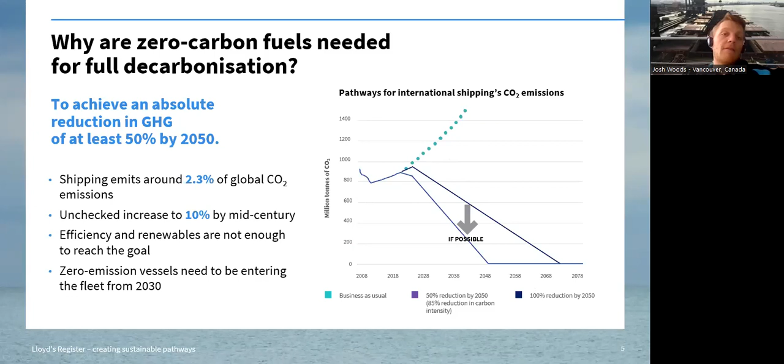And then we've got to look at it from, I think, the marine industry. The IMO and the different regulatory bodies are very good at looking from a tank-to-wake perspective in terms of energy emissions. However, I believe, and at LR we believe, we need to look at it from a more holistic point of view. So it's a well-to-wake perspective.

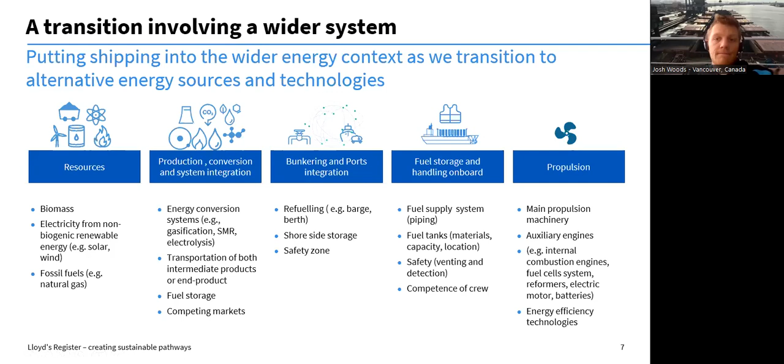So this is our LR decarbonisation hub and getting to zero model. And actually, I'll just take a step back here a minute. I know I mentioned the decarbonisation hub. It's a particular department within LR. It's not who I work for, but it's our focal point within the business for all decarbonisation projects and initiatives. It's run out of the UK in Southampton. If anybody wants to hear more about it, please get in touch with me. I can put you in touch with the guys there.

I think we're up to about 10 people now within that hub who are coordinating all our worldwide projects on how to decarbonise the shipping industry and how we can help our clients. And the way we're doing that is projects come into us all the time, and we're looking at them from our getting to zero model, and we're using a marine solution readiness level. That combines the technology readiness level, the community readiness level, and investment readiness level to give us a marine solution readiness level. And that is how we judge when a fuel is going to be available and ready to use in the marine industry.

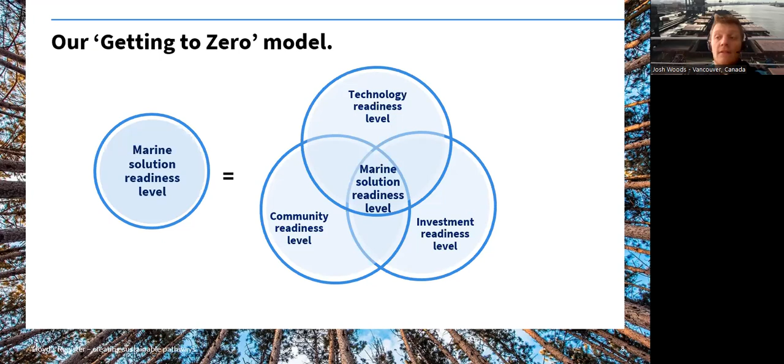It's basically looking at: is it suitable for use now? Can we use it now? Is the technology ready for it now? Is the community ready for it? And, more importantly, is anybody going to pay the money to put that fuel on the ship now? Or is it going to be 10 years, or is it going to be 20?

And I don't know if anybody saw, but LR recently sold our business assurance business, and we're now wholly focused on marine clients and the marine industry. So we don't have an energy business anymore. We don't have a business assurance business anymore. We're just solely focused on marine. And from my perspective, that's already making a difference. We're already able to focus more on our clients and be their trusted advisor.

And it's a complicated issue, right? There's lots going on, and a lot of ship owners are just waiting to see what happens. There's a reluctance to be a first mover. So at LR, that's why we've got the decarbonisation hub. That's why we're doing all these initiatives. We're publishing all this material just to try and help and guide the industry. We don't necessarily want to be the people to make the decision, but we want to help our clients make an informed decision.

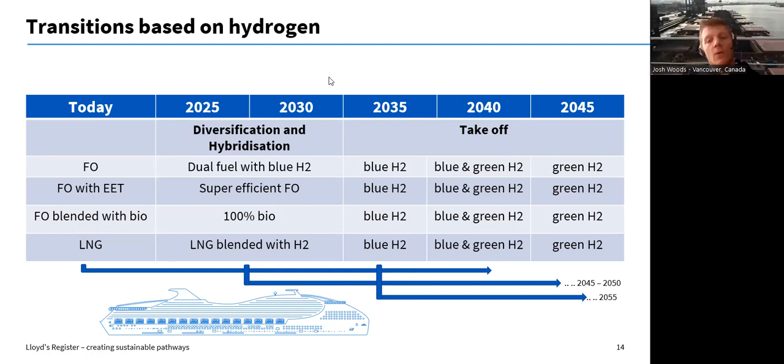Personally, I don't think that's going to happen. I don't think there's going to be one fuel fits all, but this is some of the key features of hydrogen. I'm not going to go through this in any detail because it's very easy to look up and you don't need me to tell you.

But there's distribution challenges, and it's very hard to store because it's very small molecules and it disappears really quickly. So there are quite a few issues with it, but it does have a lot of potential as well. I can share this presentation afterwards, so if you want to look at it in more detail, you can go through this slide at your leisure.

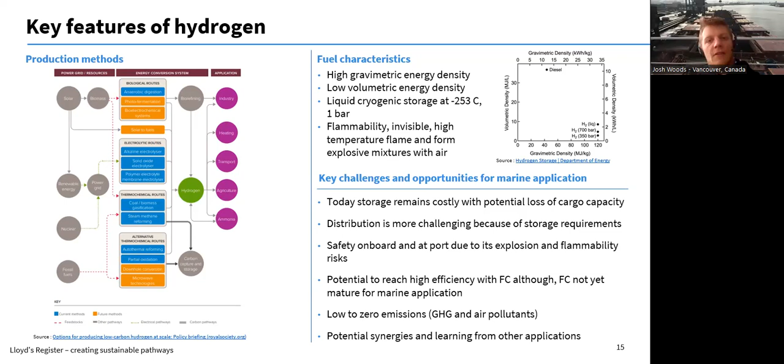So there's lots going on in the hydrogen space, and I know big oil majors such as Shell have all their eggs in hydrogen. I think it's definitely got a future, and Shell believe LNG is a transition fuel, and they don't think ammonia is the way forward. I mean, you've got to take it with a pinch of salt because Shell don't produce ammonia, but they do produce hydrogen. So there's lots of forces at play here.

But definitely some big industry powers behind hydrogen as a future fuel, and we're here to help them through these test beds and pilots that I've just described.

And now we go on to ammonia, and this is how we believe ammonia would work over the next 30 years if the industry adopted ammonia. As you can see, it's a very similar transition. So you've got your diversification, hybridization, so dual fuel, efficient ships, and LNG, and then you've got your ammonia that's produced through different sources. So you've got ammonia produced using fossil fuels, and ammonia produced through more renewable energy.

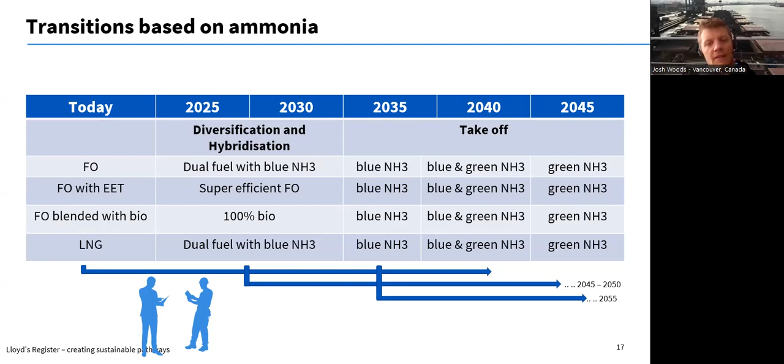So you have your green ammonia. I'm not going to dwell on this slide because it's very similar to the hydrogen transition pathway. Ammonia also has its own problems. It's very toxic, and so there's issues with machinery space having

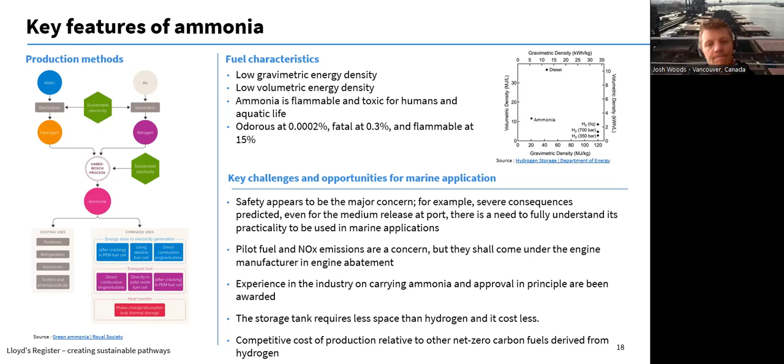What we did, which is fairly unique, is we approached an agricultural company that produces ammonia, because the main use of ammonia at the moment in the world is, I don't know whether it's pesticides, but it's used in agriculture. It's not used as a fuel at all. So we're working with one of these companies that produce ammonia, and we're pulling them into doing an AIP with

Has anybody got any questions as I go through, or are you happy for me to keep going? Silence, Josh. So I would keep going. Okay. Perfect. I'll take that as you're all absorbed in my presentation, so we'll keep going.

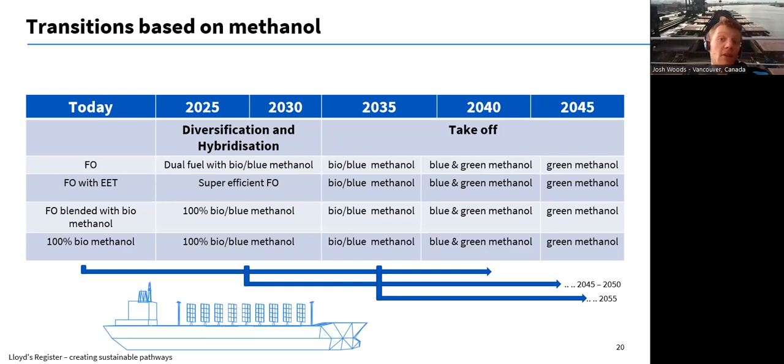This slide is very similar to the previous slides, but the interesting bit is how the ship owners, the operators, and the classification societies are going to work together to get all these ships online and trading on these alternative fuels in the early 2030s. There's plenty of pilots we've been running with methanol as well, with various industry bodies and ship owners. Those are the transition pathways from where we are at the moment to where we're going to be in 2030, 2040.

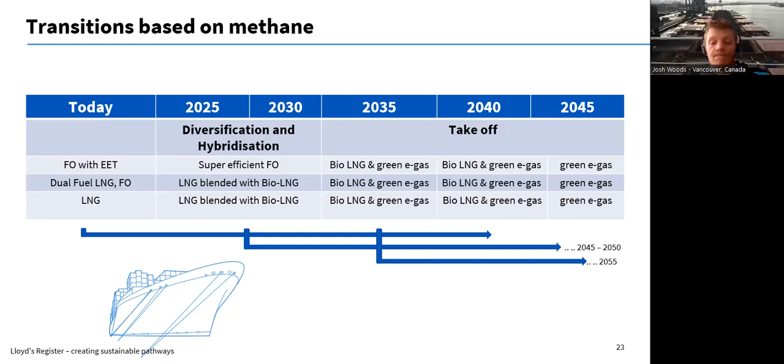Now I'm going to talk a bit more about the overall readiness of these zero carbon fuels. So how ready are they? How quickly can we get them into the industry and onboard vessels? This is something we've developed. It's called the Zero Carbon Fuel Monitor, an interactive fuel monitor where you can play around with the dashboard and look at the technology readiness level, the investment readiness level, and the community readiness level for a particular fuel.

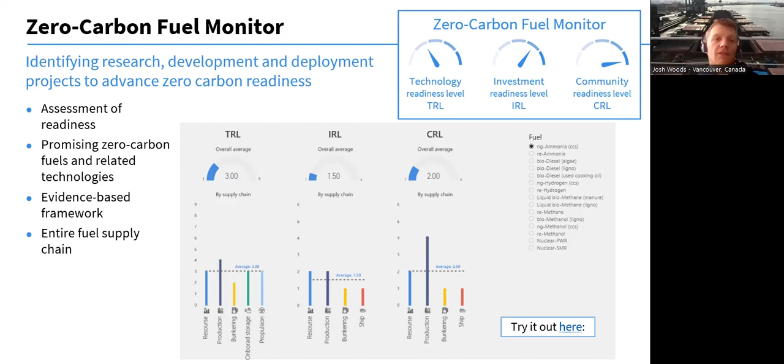And this is an interactive, free-to-use tool that we've really used to assess what level the fuels that you're looking at, or the fuels that your clients or ship owners are looking at, are at, what stage it is at the moment, and how we think it's going to be suitable in the future. So I'll just talk a little bit about the different ways we're assessing the fuels.

And as you can see, like the levelized cost of production. So the investment readiness is essentially going to boil down to the cost of these fuels, how much it costs to produce and how much it's going to cost our clients in the future to use those fuels. And to simplify it, is the cost prohibitive for anybody to invest in those fuels at the moment? And how long is it going to be until the price of those fuels comes down for them to be suitable to be used?

Because at the end of the day, you guys all know that we, as a shipping industry, have historically just used what's the bottom of the barrel, heavy fuel oil. It's the cheapest fuel that nobody else wants to use, and that's what's been fueling the ships going around the world for the last 50 years at least. So for us to change from that inexpensive bottom of the barrel fuel to something that's a lot more expensive, something's going to have to change, and somebody's going to have to pay the bill.

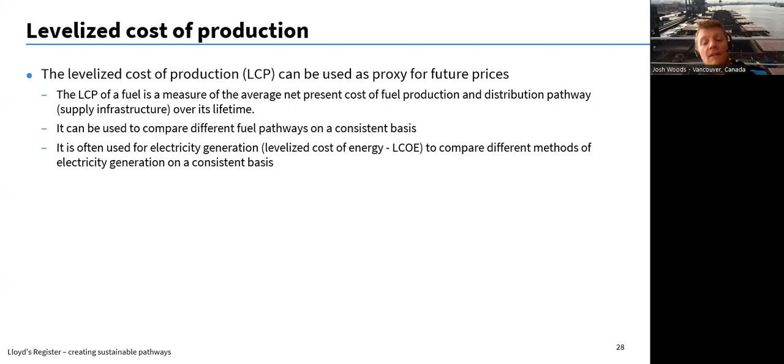Sorry, I've got this recurring error on my Outlook.

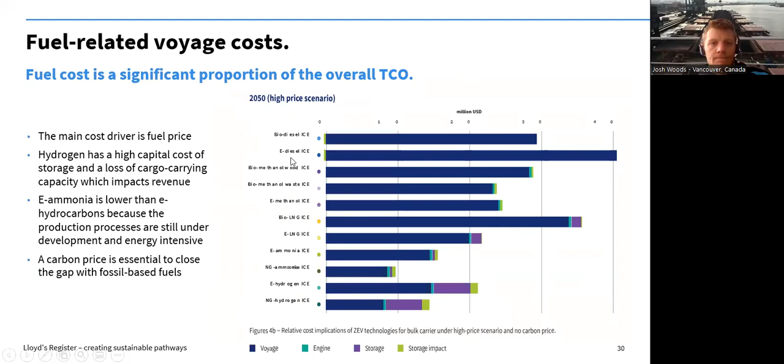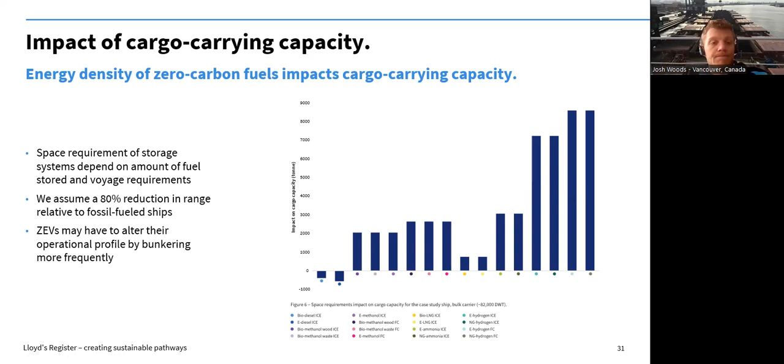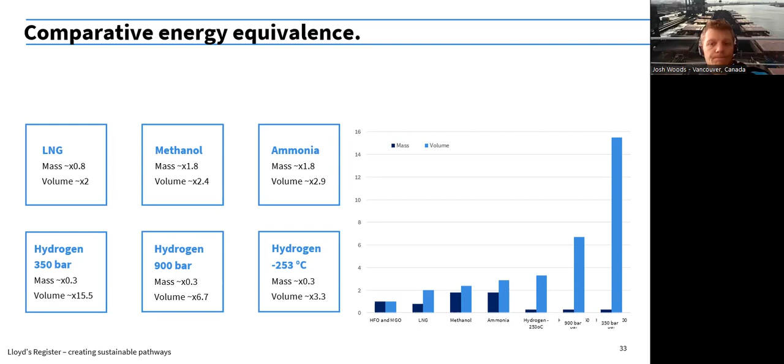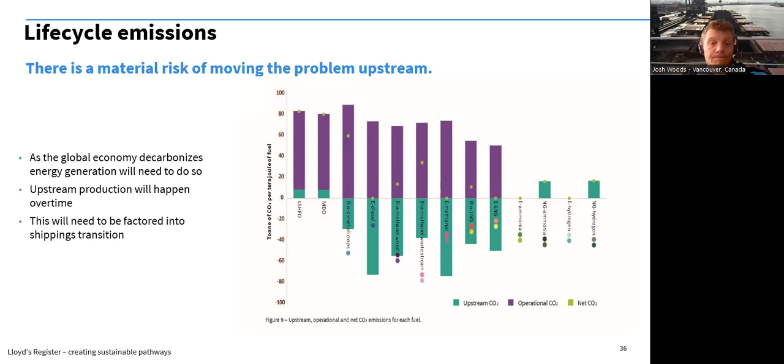It is more expensive to build these ships for future fuels. We're talking in the region of, I think, around 20% more expensive to build a ship with these future fuels. But your impact for your interested parties is over the lifetime of that ship, and how much your OPEX is going to be impacted by having to buy this future fuel, and the market forces that are at play.

And ultimately we can talk about the future fuels quite extensively, but I believe that we're going to be, not a victim, but forced to use whatever fuel the market pushes onto us. We've used heavy fuel oil for the last 50 years not because anybody wants it, but because it's the cheapest fuel, so obviously we're going to use it. I think it's going to be a market-driven technology and market-driven fuel that we're going to use. I don't think the marine industry is necessarily going to choose it.

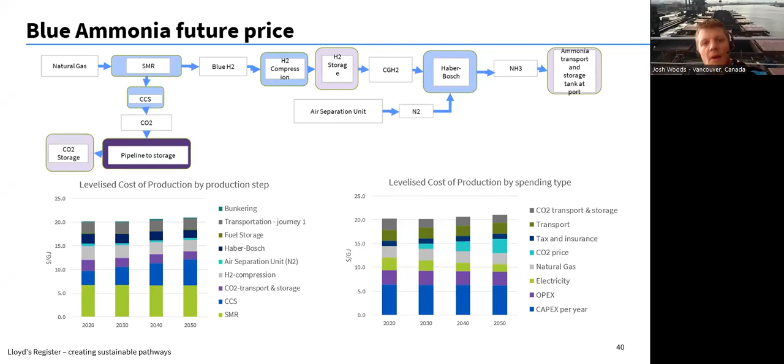So they're the three key messages and key takeaways I hope you'll remember from this discussion: you've got to have these three. You've got to assess a fuel from these three different perspectives for it to be viable, for us to get to those IMO goals. And this is just an example of ammonia and how it works. I probably won't go through this.

I don't think it's worth going through it because it's quite complicated, but you can study it at your leisure after today.

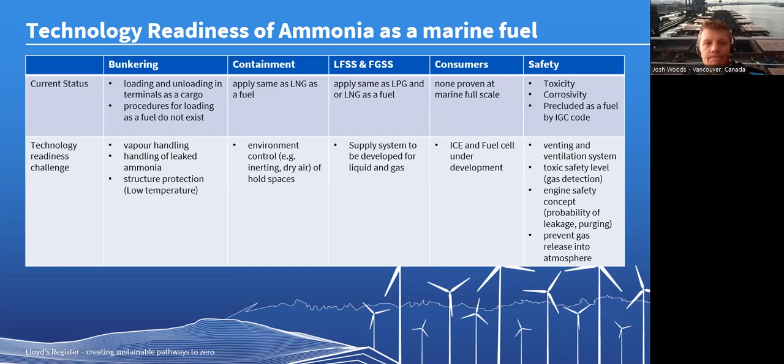Great. Well, that's me. I think I've had about 20 minutes there. So yeah, very happy to take some questions and discussion points, or we can move on. Up to you guys. Many thanks, Josh. Any questions for Josh? Josh, question. Oh, go ahead. Yeah, go ahead. Hi, Josh. How you doing? Yeah, good, Jason. Good to hear from you.

It's a quick one on the fuels. Are you seeing a drive by the fuel producers pointing in a specific direction, like concentrating more on hydrogen or ammonia or methanol? Yeah, so it's a good question. The two examples I've got, I touched on in the presentation. Ammonia, as I said, is not being produced by anybody that's in any way linked to the marine industry at the moment. So there's no supply chain, there's no desire really from the current producers to supply the marine industry.

It might be that that changes in the future, but they're not going to be driving this agenda. They'll obviously sell to the marine industry if there's a market there, and if the marine industry adopts ammonia, there's going to be a huge demand for it. So they'll ramp up production. They'll be keen to sell. And also there's the issue of the infrastructure between the plants that are producing ammonia at the moment and getting it on board the vessels. But from the fuel producers, from an ammonia standpoint, there's no real push from them apart from being able to see a future opportunity to sell more ammonia to marine clients as opposed to just selling to agriculture clients at the moment.

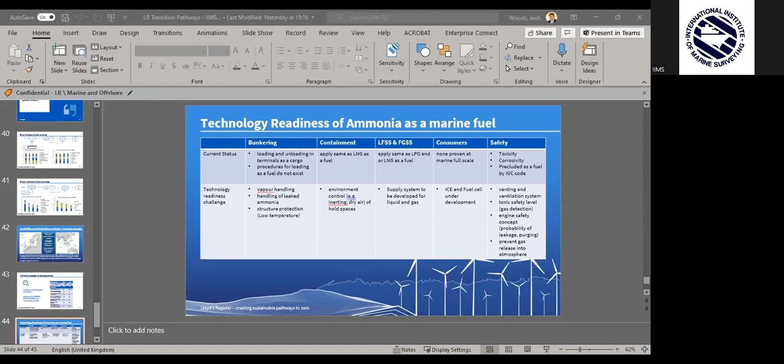Ed, did you have a question? Actually, I did, but I think we've kind of covered it. I was just going to use an example here on the Great Lakes, where over the last 15 to 20 years our domestic fleet operators have renewed their fleets, and they've gone to more modern tier 3, tier 4 engines. Two companies have introduced biodiesel that they're using, and other companies LNG.

Looking at the community-based readiness, I haven't really got involved too much with the domestic fleet fueling operations, but it's just interesting how the companies come to different approaches between biofuel and the LNG approach. Because with the biofuel, the one domestic carrier has a supplier in Sarnia, Ontario, that is a single source. I think they are the only supplier of biodiesel on the Great Lakes at the moment. And it goes back to Sarah's question, will there be a predominant fuel?

Interestingly, though, when I try to create my own analysis, the more domestic ship versus the one that is on LNG could be flagged in and out of the Great Lakes. So my question was about community readiness in terms of supply and infrastructure. But I think your point is well noted, where probably futuristically the ships will be designed on trade and fuel moving forward, because I think the cost and the capacity is just going to dictate that, right?